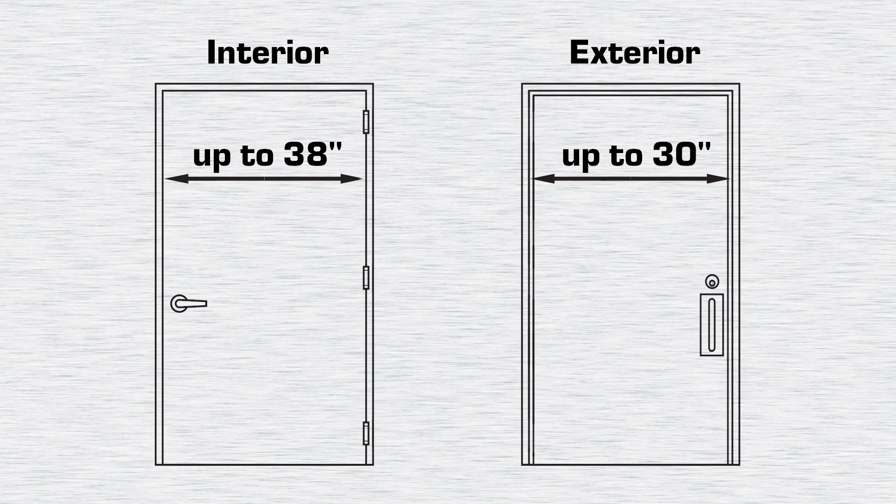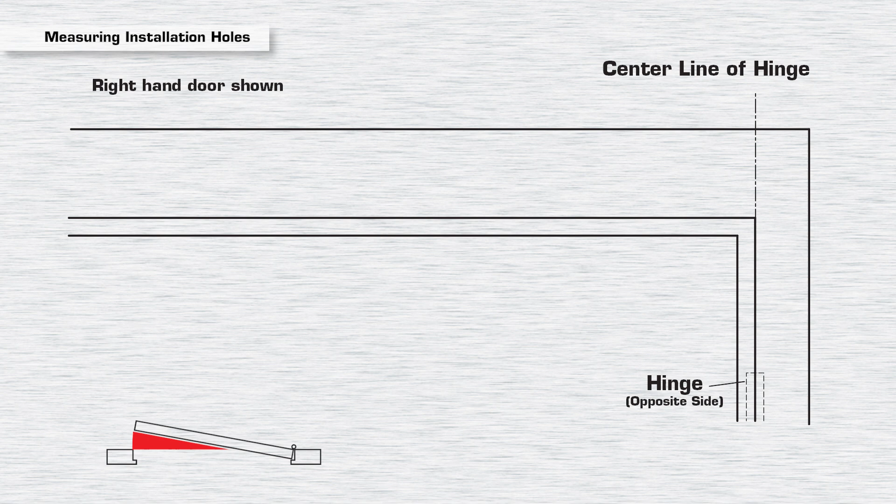To mark your installation holes, first determine the maximum degree of door opening. For up to 100 degree opening, measure from the center line of the hinge 7 5/8 inches on the door for the closer, and 9 1/4 inches on the bottom of the doorstop for the PA plate.

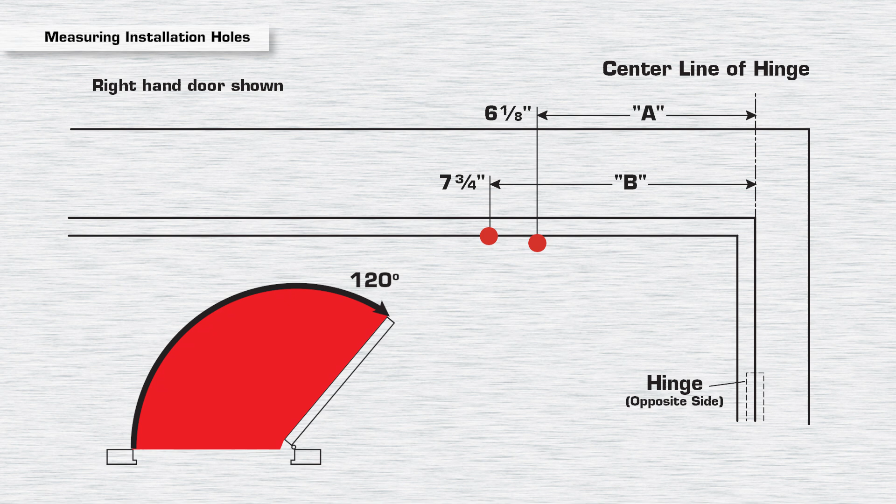For up to 120 degree opening, measure from the center line of the hinge 6 1/8 inches on the door for the closer, and 7 3/4 inches on the bottom of the doorstop for the PA plate. For up to 180 degree opening, measure from the center line of the hinge 4 1/8 inches on the door for the closer, and 5 3/4 inches on the bottom of the doorstop for the PA plate.

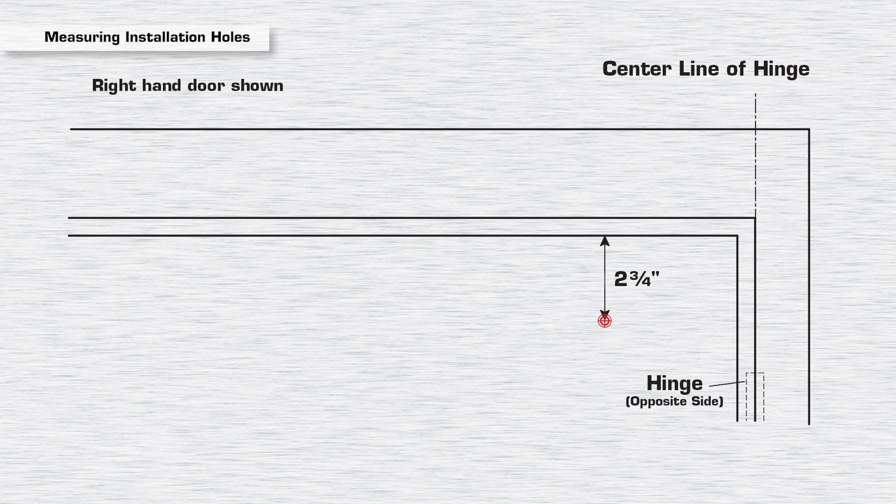Then, using the mark on the door as a guide, from the bottom of the doorstop, measure 2 3/4 inches down to mark your first hole. Use the following dimensions to measure for the remaining hole locations. For the PA plate, using the mark on the bottom of the doorstop as a guide, measure 7/16 of an inch from the door to mark your first hole. Then, use the following dimensions to measure for the remaining hole locations. Note, the same dimensions apply to left or right-hand doors.

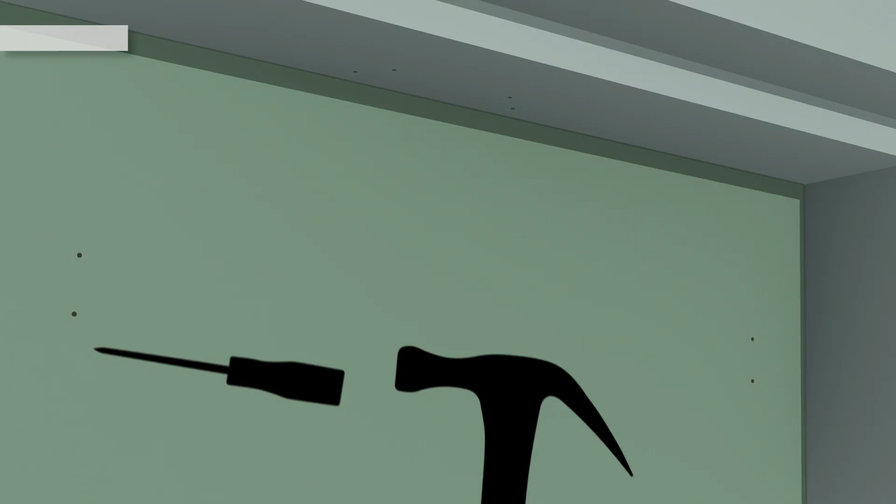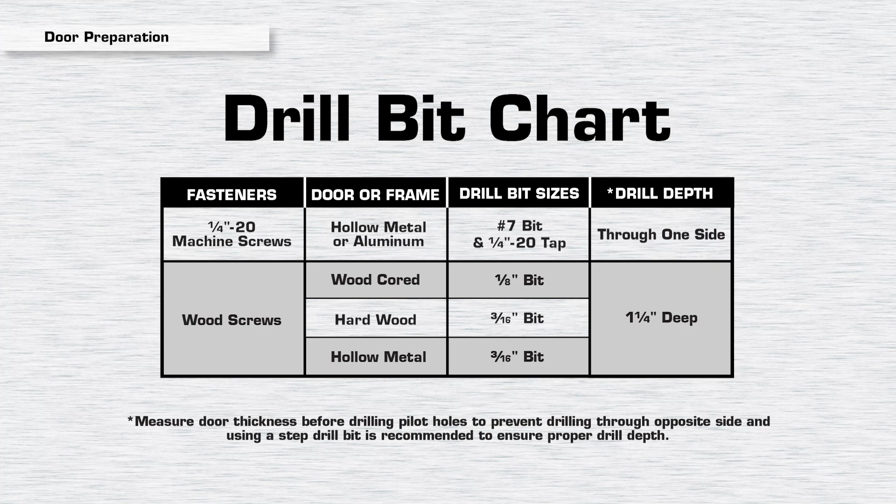Use a hammer and punch to mark the center of each screw hole. Using the chart, select the appropriate drill bit based on the type of fastener, your specific door material, and application. Be sure to drill the holes at the specified drill depth to prevent drilling through the opposite side.

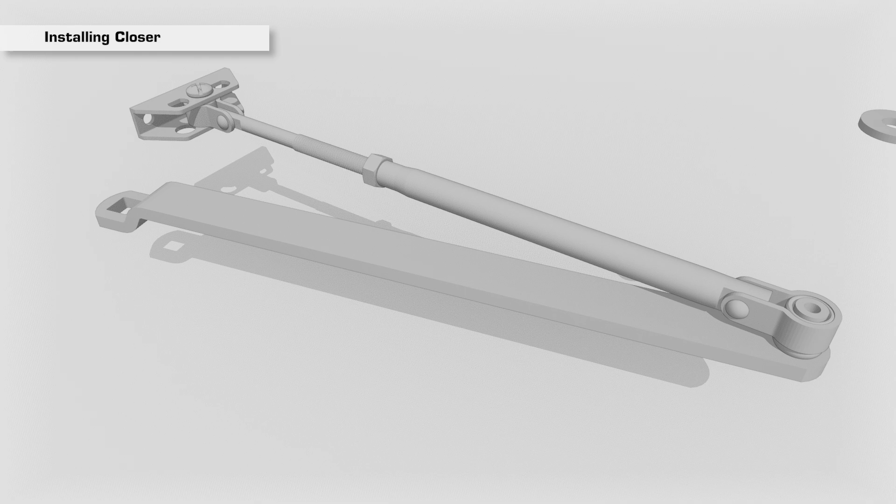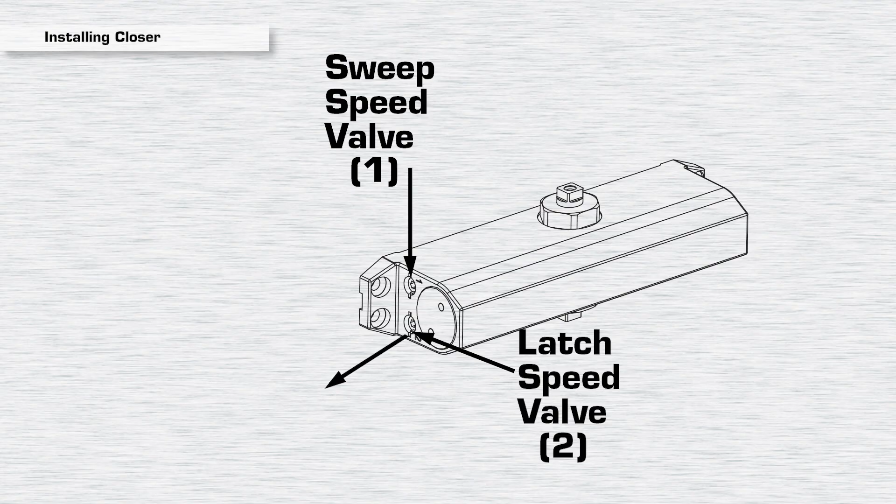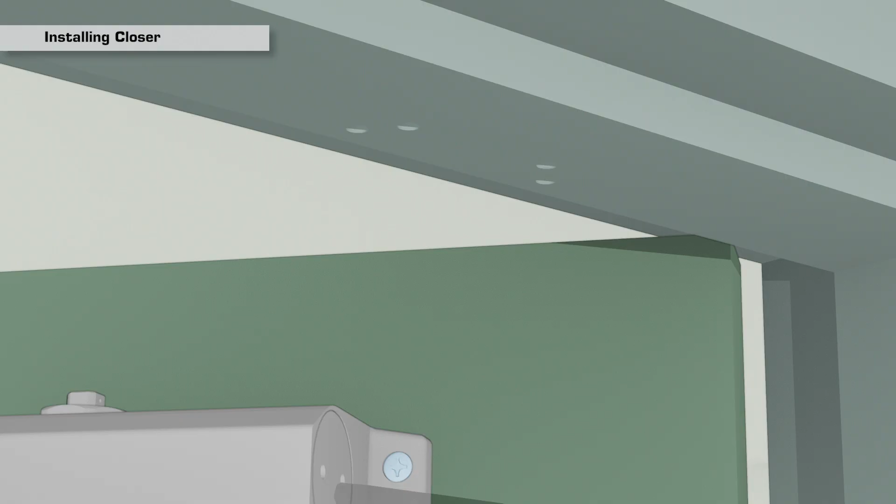Disassemble the forearm from the main arm by removing the elbow screw and both washers. Remove the foot from the forearm, keeping the screw. Keeping in mind that the speed regulating valves labeled 1 and 2 will need to be positioned facing the door opening, position the closer body over the drill holes on the door and fasten with 4 flathead screws. Using the 4 roundhead screws, attach the PA plate to the bottom of the doorstop.

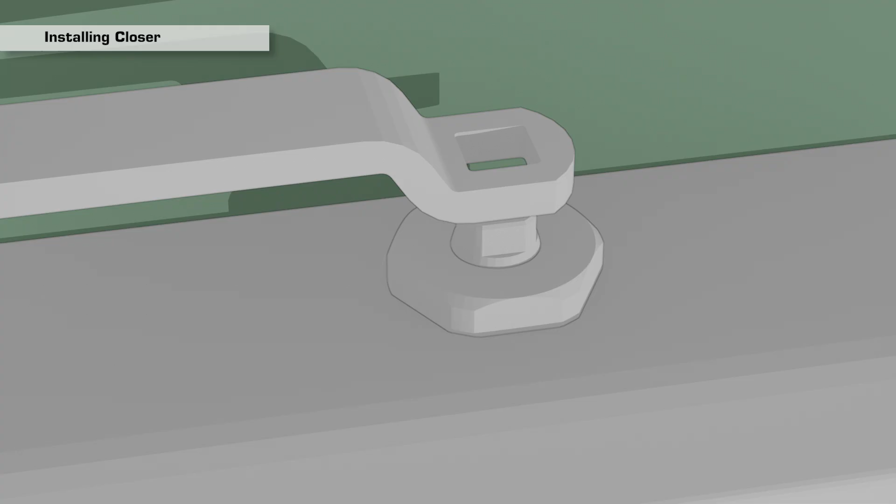Before installing the main arm on the top pinion shaft, using a wrench, rotate the pinion 90 degrees towards the hinge side of the door, aligning the pinion dimple at the base of the main arm as shown. Then, fasten with the main arm screw and large washer.

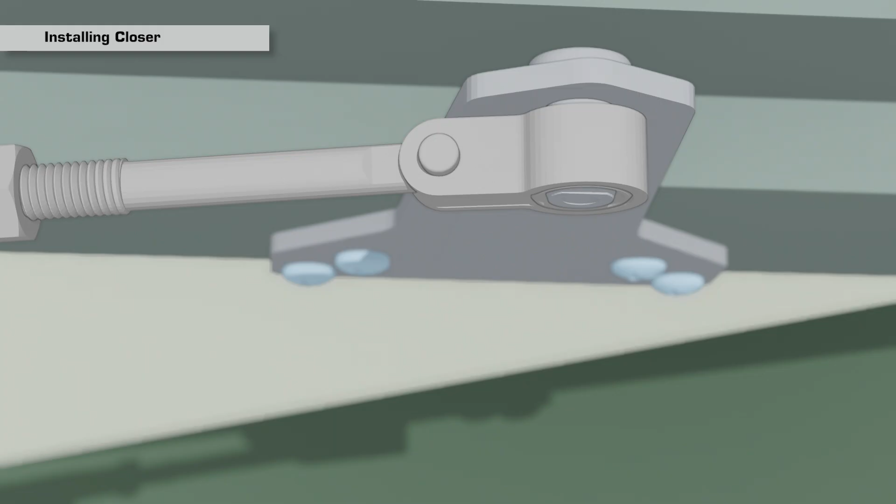Fasten the forearm to the PA plate using the provided smaller washer, spring lock washer, and screw that was removed from the foot earlier. With the door closed, adjust the length of the forearm so that once connected to the main arm, it will set the arm elbow about 1.5 inches away from the door. Reassemble the arm. Bring the main arm and forearm together at the pivot point, then, with the door open, fasten with elbow screw and both washers.

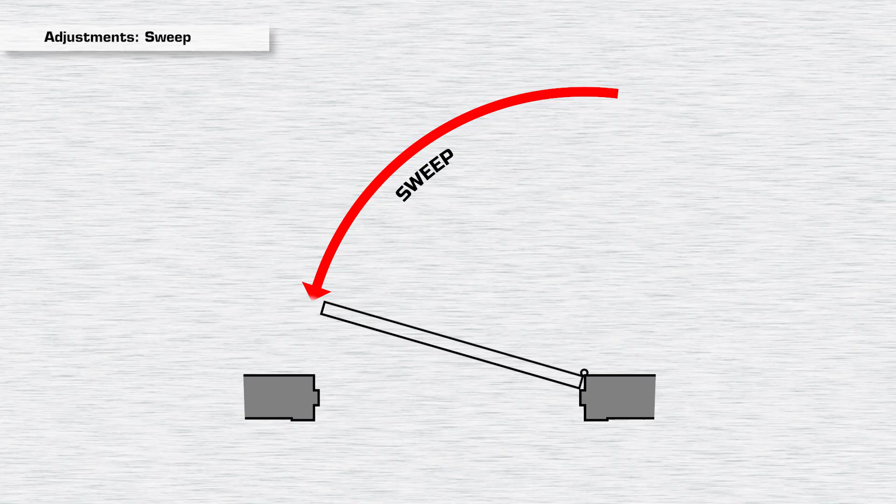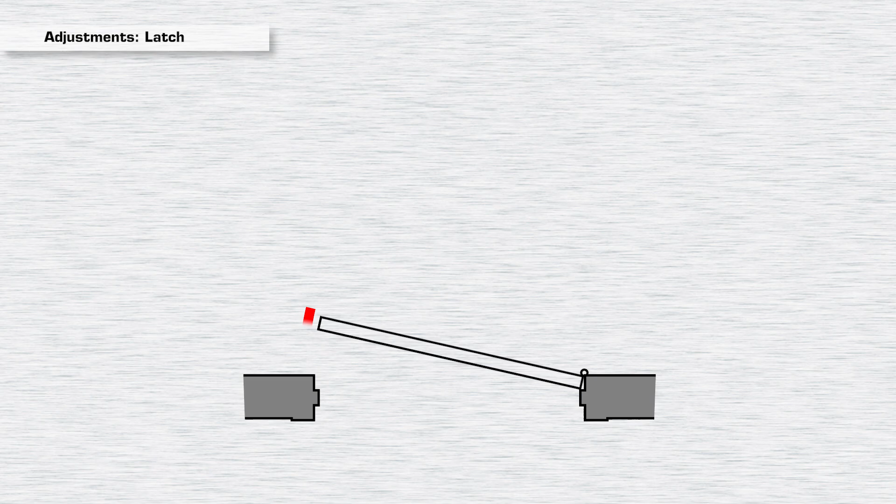To adjust the speed of the sweep, which is the closing speed from the door being all the way open, turn the screw labeled 1, clockwise for slower, or counterclockwise for faster. To adjust the latch closing speed, which is the closing speed from the door being about 20 degrees open to completely shut, turn the screw labeled 2, clockwise for slower,

or counterclockwise for faster. Be careful not to back any of the valves all the way out or a leak will occur. Snap the pinion cap over the pinion at the bottom of the closer. Your new Universal Hardware size 3 closer is now ready for use.